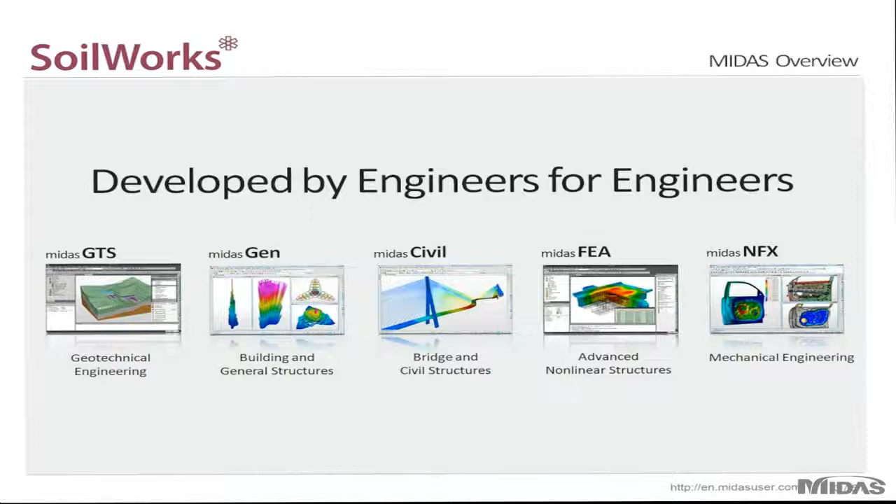Our company was founded about 20 years ago, but within that short time frame, we've been able to establish a worldwide network. Hundreds of thousands of engineers around the world are currently using our software, and it's a very powerful tool for them. They've been able to increase the efficiency of their work and save much time and money.

We pride ourselves on being total solutions providers. Any types of problems or projects that engineers face, our software provides solutions. We have world-leading technology - our software is used by leading firms around the world for landmark projects. From imagination to creation, our software provides the tools to make engineers' visions a reality.

And of course, our global network - by becoming a Midas user, you join a network of engineers that are using the software and supporting each other. We analyze and design the future. Our software is used for projects that create a better world, a better tomorrow.

We have a lot of industry-leading companies that use our software, and they've used it for many landmark projects. For example, the King's Cross Station in England was analyzed and designed using Midas GTS.

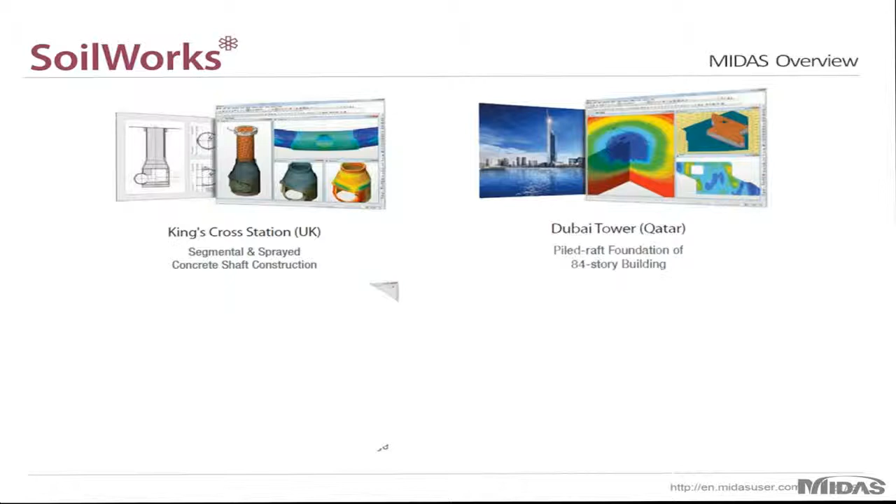Also, the Dubai Tower in Qatar, the Pile Raft Foundation was designed and analyzed using Midas GTS. Then the Russky Island Bridge in Russia, currently the world's longest and tallest cable-stayed bridge, was designed using Midas Civil. And the Burj Khalifa Tower, currently the world's tallest building, was analyzed and modeled with Midas Gen.

Now I'll talk a little bit about SoilWorks and give a brief introduction to it. SoilWorks is an all-in-one software package that's been designed to handle any type of 2D geotechnical project you may encounter, and it's separated into 6 different modules. This video briefly touches upon each module, and I'll go over the main features.

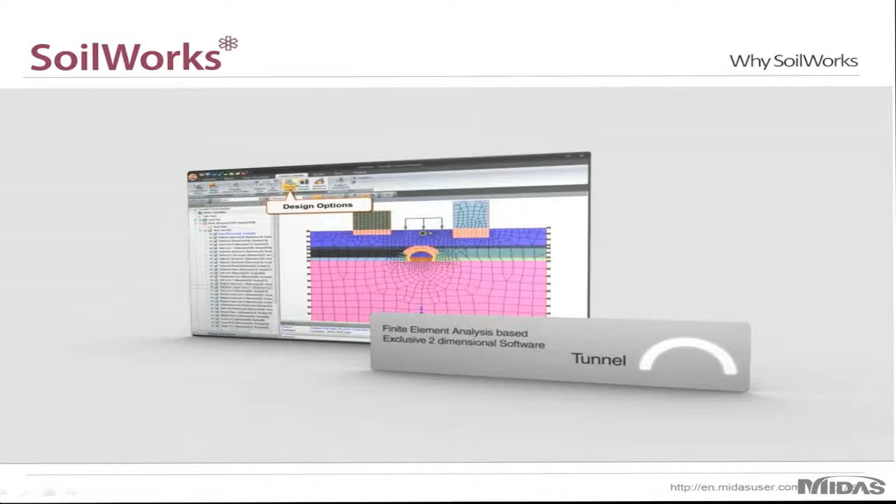There's the tunnel module for your tunnel design and analysis, also your general FEM modeling. You can also use it for excavation projects, and as you can see, you can get the effects of excavation on local structures.

The slope module for cut and embanked slopes. A great feature of this module is you can perform FEM and LEM analysis simultaneously. You can also check your reinforcements.

The soft ground module for settlement. You can analyze the settlement of a clay soil over a long period of time. You can also analyze the immediate settlement of sandy or siltier soils.

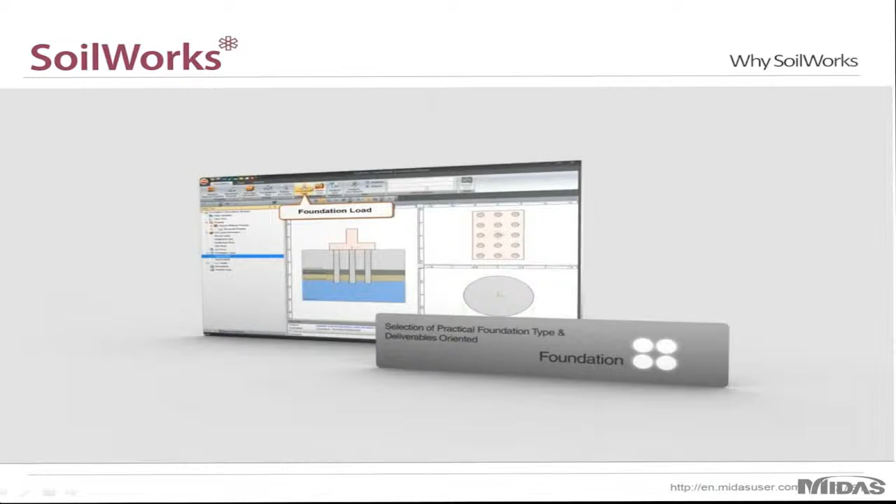Then the foundation module for PY analysis of your pile configurations. You can model multiple pile configurations simultaneously and immediately get your results.

And then the seepage module to analyze the effects of seepage on your soil interaction or your foundations. This is often used for dams and levee analysis, but you can also use it in coupled analysis with a slope module. Then last, the dynamic module for your seismic analysis. The program has a database of history records for earthquakes, so you can get a very accurate simulation of an earthquake in the area in which your project is involved.

So those are just the 6 modules. As you can see, any type of project that you might face can be handled with this software. It's an all-in-one package.

One of the main things to remember about SoilWorks is that it's very fast. We've created 7 innovative smart features to help cut down on the time it takes to perform your modeling and analysis. This primarily focuses on eliminating repetitive processes and reducing the number of steps it takes to complete your projects.

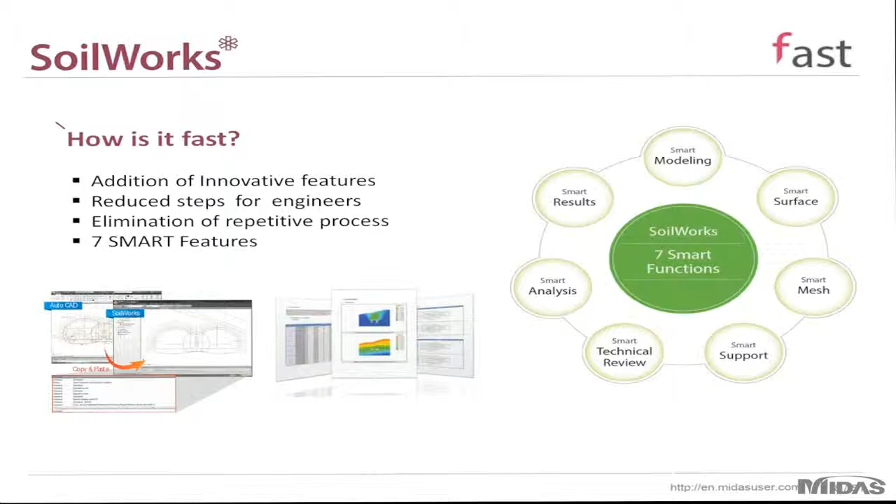The best way to really demonstrate how fast SoilWorks is is just to give a demonstration. In the following video, we'll watch a user using SoilWorks to model and analyze a tunnel project. As he does so, he'll be using several of these smart features, and I'll just be touching on each one as we watch.

First, he'll choose the tunnel module, since this is a tunnel project. Afterwards, he'll define his units. We have a broad list of options for your units—everything's included. Next, he'll import his AutoCAD file. Instead of having to draw your model in the program, you can just import it directly, so within a few seconds your drawing is set.

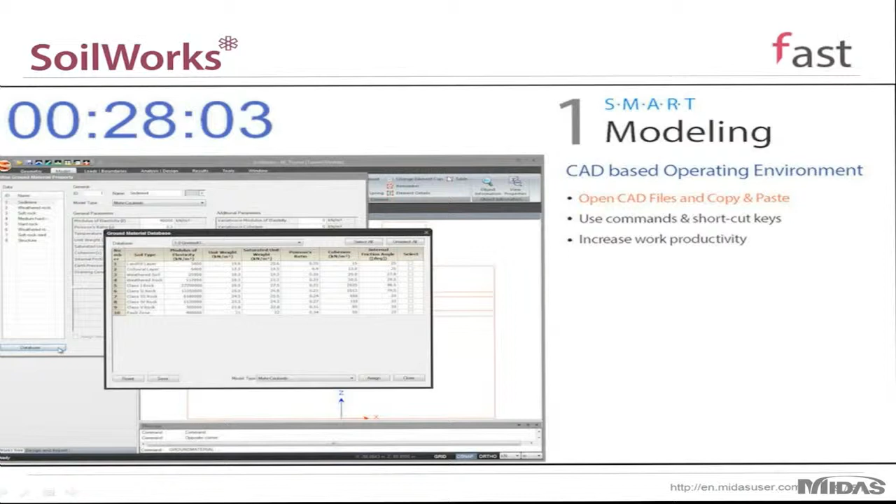Next, he'll assign ground material properties. We have an extensive database of ground materials that you can intuitively choose from, and each material comes with its various properties. If a material isn't included, you can just input it into the database.

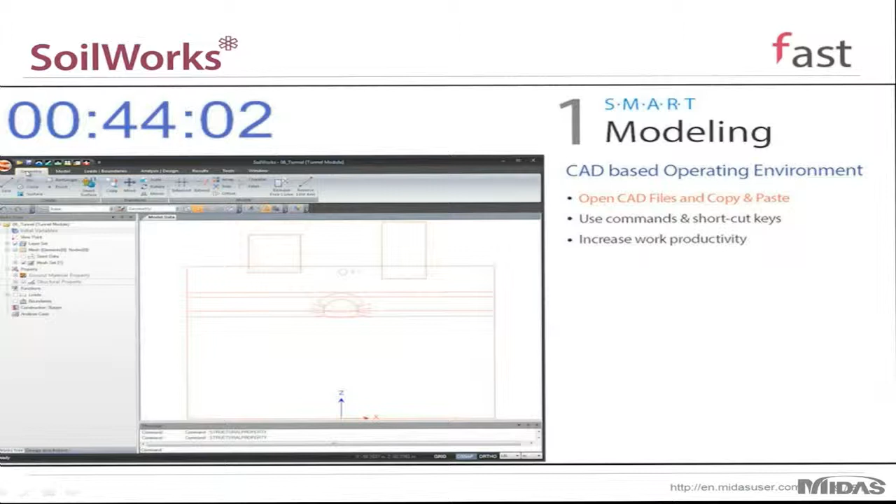Then structural properties. We also have an extensive database of various structures, their properties, and section shapes and types for any kind of element you'll be using. There's also a smart surfacing feature that allows you to intuitively separate your surfaces, and the user simply drags and drops the material and structural properties onto the drawing.

Then there's the smart mesh feature—within a couple of mouse clicks, you can have your meshing set for you, along with all of your mesh sets in the work window.

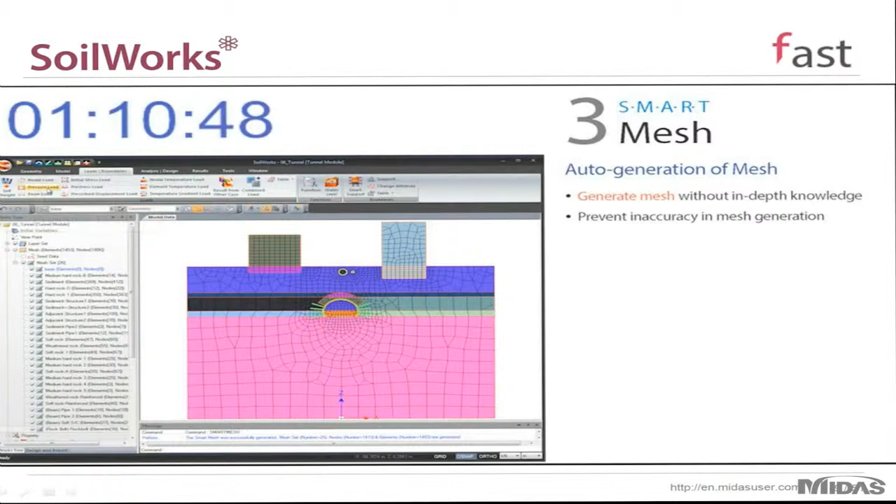Next, he'll be applying his pressures. For this particular project, he'll apply a distributed load just over the tunnel to represent traffic. The Smart Support feature allows you to intuitively set your boundary conditions.

Then there's the changing attribute feature. This allows the user to change the attributes of various materials over a certain period of time. For example, in this construction stage analysis, the attributes of the foundations will be changed, and that's what the user is assigning.

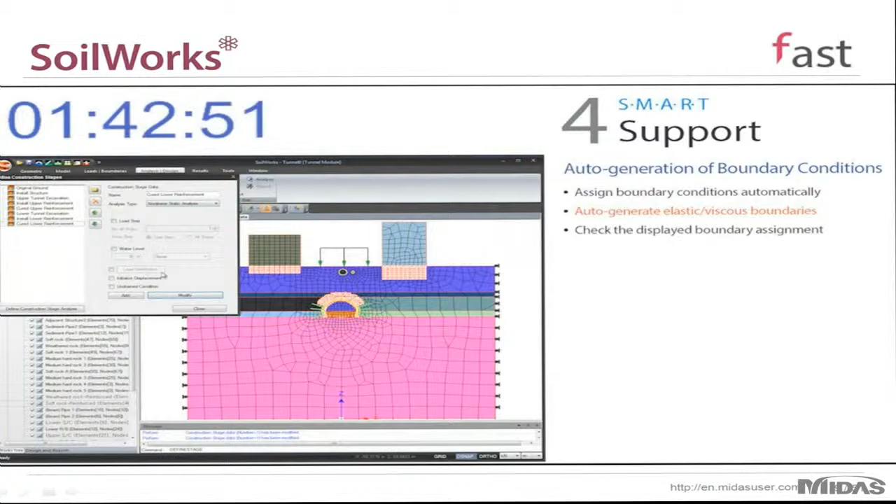Then construction stages. For construction stage analysis, you can easily format your construction stages, and also define which elements will be present during each stage, so you can get a very accurate simulation of the changes that take place over the course of excavation or construction.

Next, he'll be defining his analysis cases. This will be a tunnel project with a structure check, and he's just defining all of his properties.

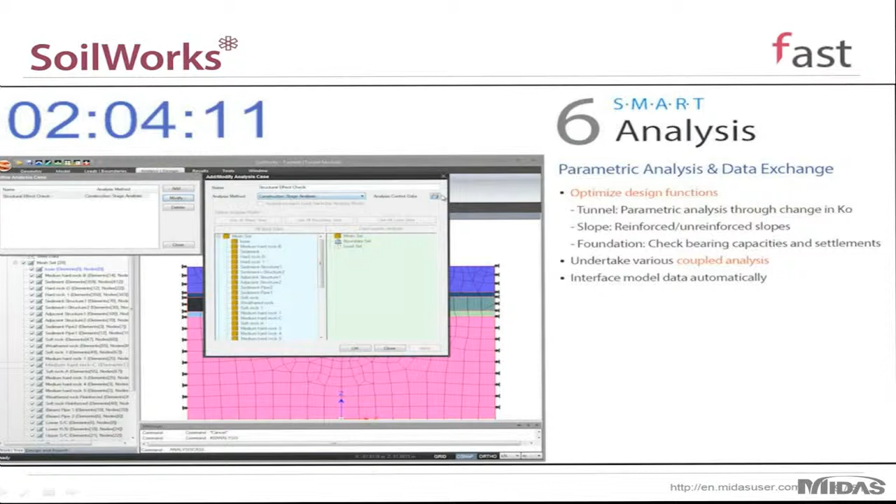Then design options—he'll be specifying his options for design, assigning the allowable displacements for the elements and also the allowable shear stress.

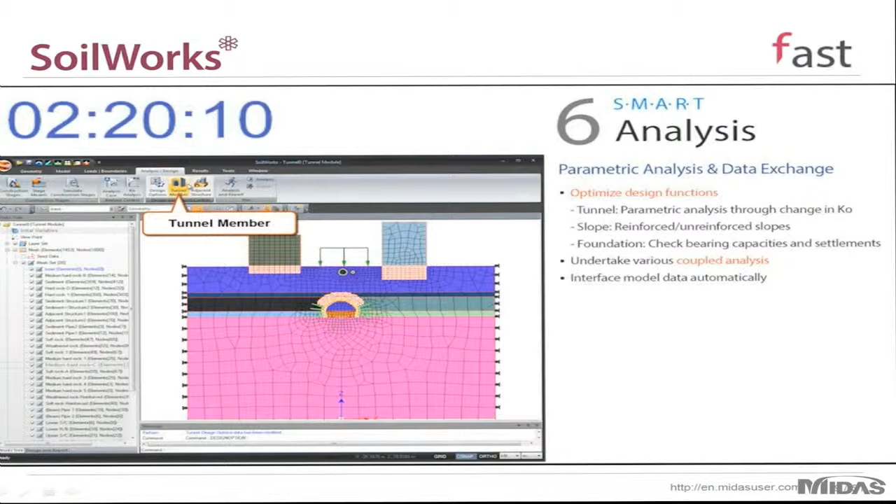Then tunnel members—this allows you to group elements you'd like to see analyzed together. In this project, he'll choose the rock bolts to be analyzed together in the final report, so instead of having to extract results from a large spreadsheet, they'll all just be grouped together for him.

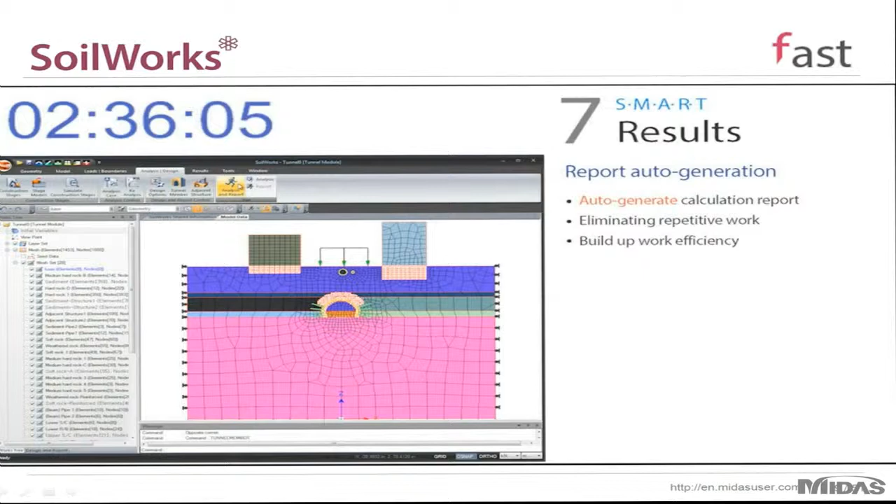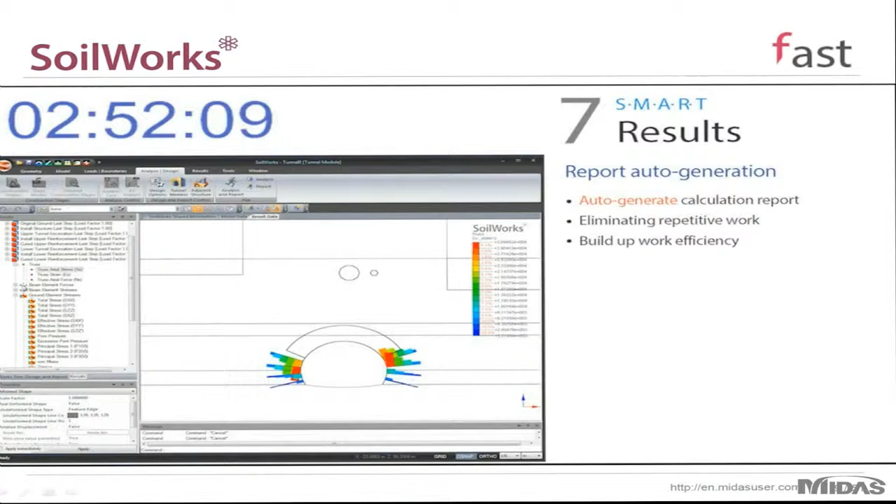And then finally, he'll perform his analysis. Within a few seconds, you're in post-processing, and all of your results are easily formatted and laid out for you. You have your contour tables representing your various displacements, deformations, etc. The rock bolts and crown members are grouped together so that in the final report, it's all very easily formatted for your convenience.

So in about 3 minutes, he was able to finish everything. Obviously, that was an idealized example, but that just goes to show how quickly you can perform your modeling and analysis with SoilWorks.

Next we'll talk about some of the key features of SoilWorks. Smart meshing—as you saw in the video, the user is able to immediately create his meshing using the smart mesh method. That being said, other options are also available to you.

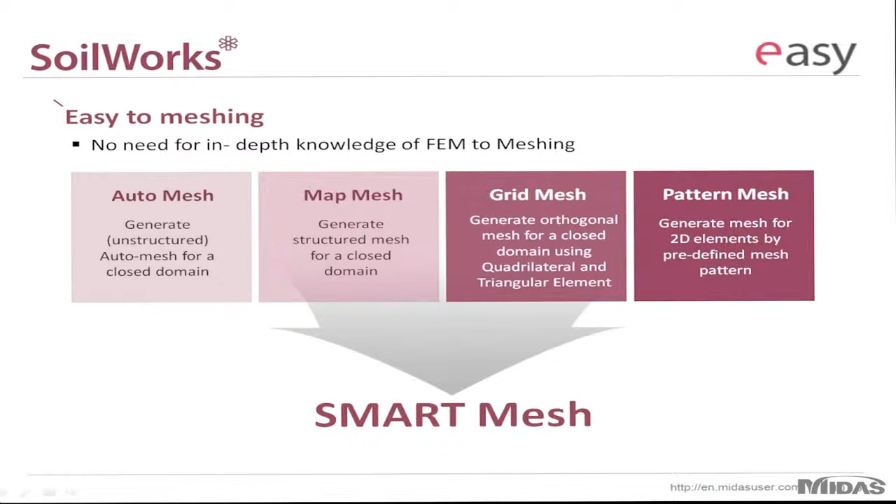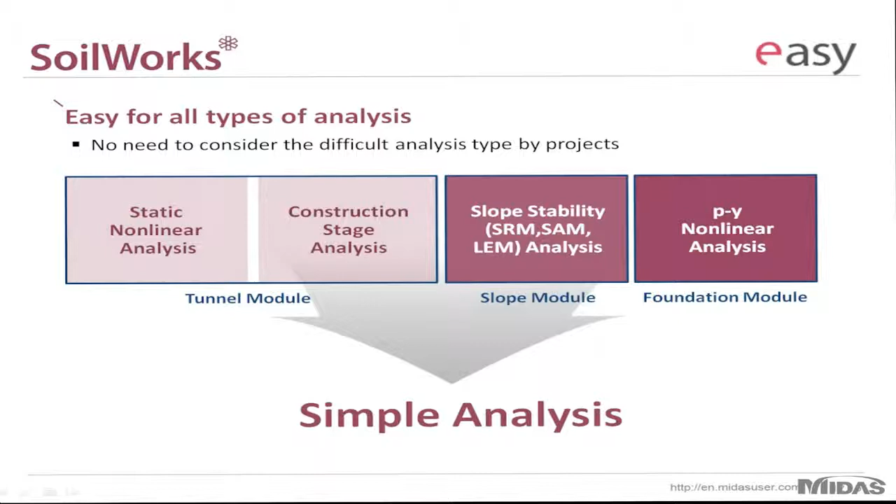You can easily create models without FEA knowledge, since we have a large database of various material types and properties you can use for your projects. Simple analysis—the software allows you to perform your analysis without having very in-depth knowledge of it, so all of these analysis types are available to you. With a simple click of a button, the software will perform the analysis for you, so you can just focus on results.

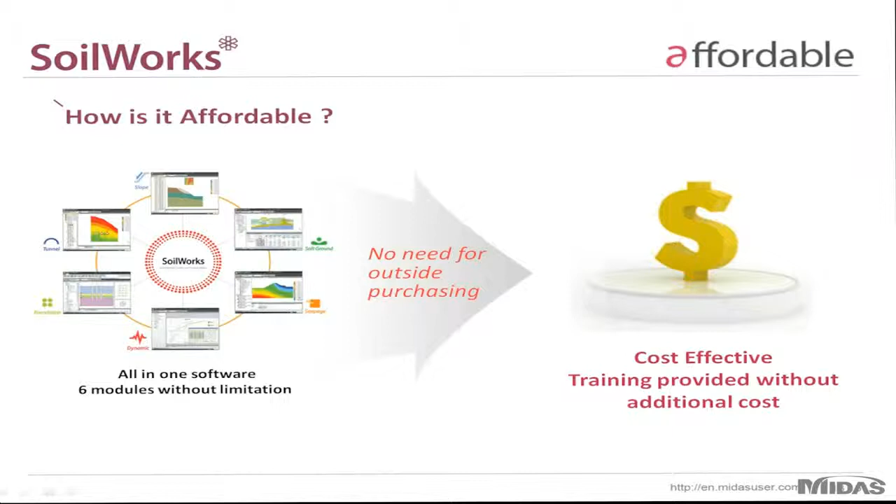SoilWorks is very affordable. As I said before, it's a 6-in-1 sort of software, so all six modules come in the package. You won't have to worry about purchasing any outside software. A lot of geotechnical companies have several software packages to handle their various applications, but with SoilWorks, you just get one all-inclusive package at a very competitive price.

So those are the main things to remember about SoilWorks. These are the main benefits. First and foremost, it's fast because of its 7 smart features, which we just discussed. It's easy, any engineer can use it. It's very user-friendly, has a very soft learning curve, and we provide free training and free technical support. And it's affordable because it's a 6-in-1 software that streamlines all of your work, so you only need one software package.

Okay, so I'll just go into a few in-depth design features now.

Currently, for example, with tunneling, there's an 8-step process that exists because of construction stage analysis. Engineers often have an iterative process in steps 4 and 5. But with SoilWorks, we're able to streamline the work so that multiple cases can be analyzed in a single file, greatly reducing the time it takes to perform parametric studies. Also, the auto report generation feature allows you to immediately generate your report through the software, instead of having to extract the results and format them yourself, within a matter of minutes.

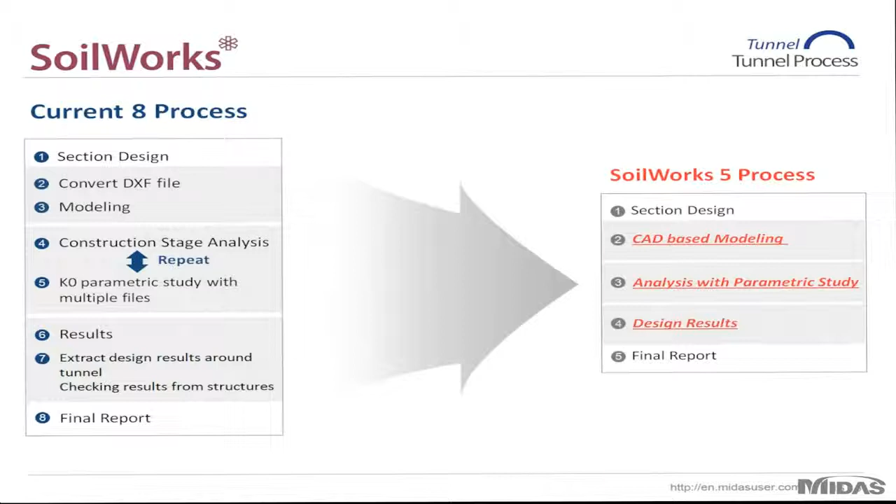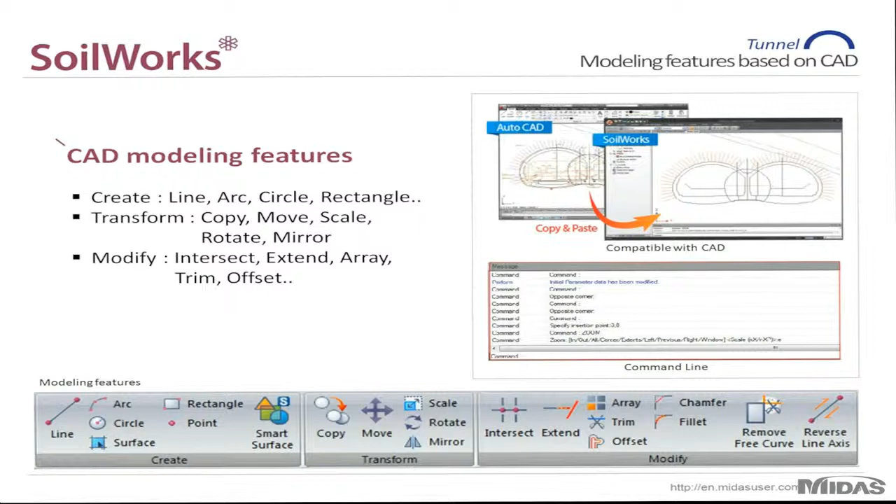CAD modeling features: another great feature of the software is that if you can use CAD, you can easily use SoilWorks to model your drawings or your projects. All of these commands should look familiar, so if you're familiar with CAD, you can easily just use SoilWorks to do all your modeling.

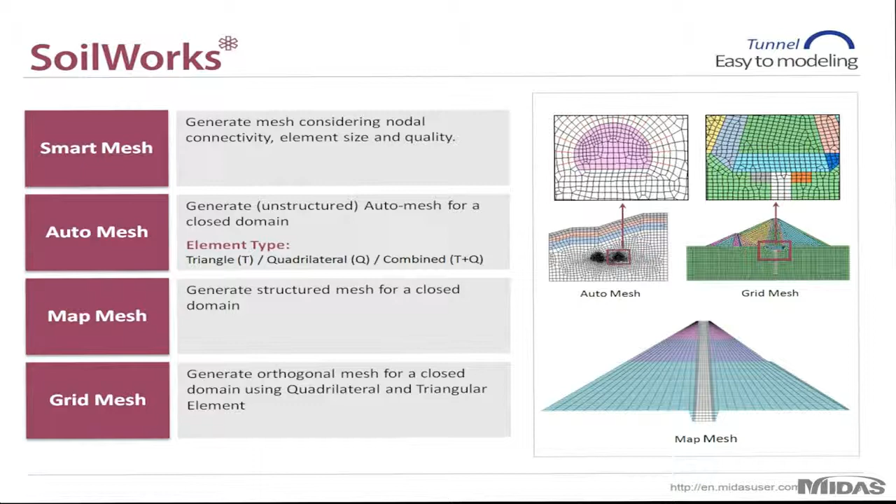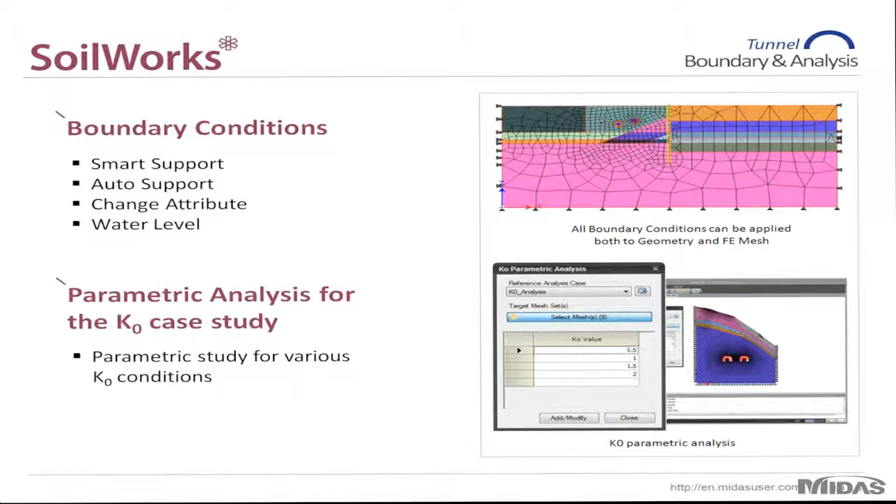Smart meshing allows you to intuitively create your mesh, but if at any time you need to do auto, map, or grid meshing, these options are available to you. Boundary conditions, as you saw in the video, can be created very intuitively. And load types: the software includes all load types that you could possibly need for your projects.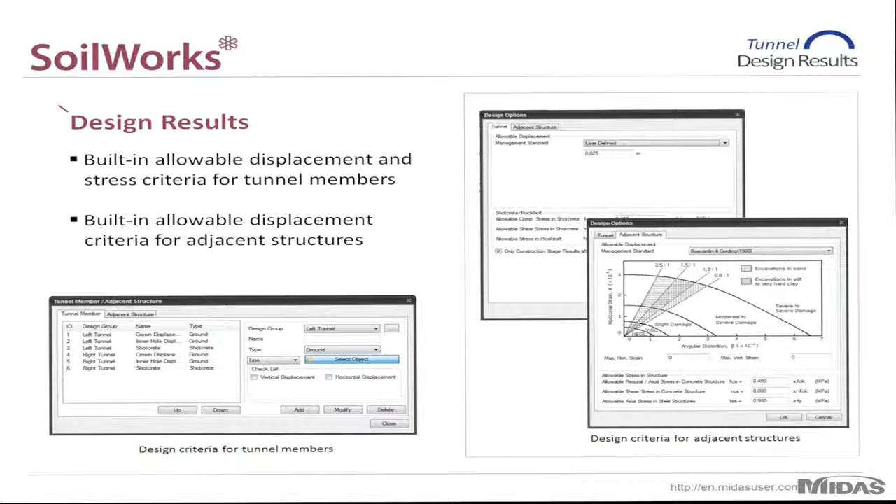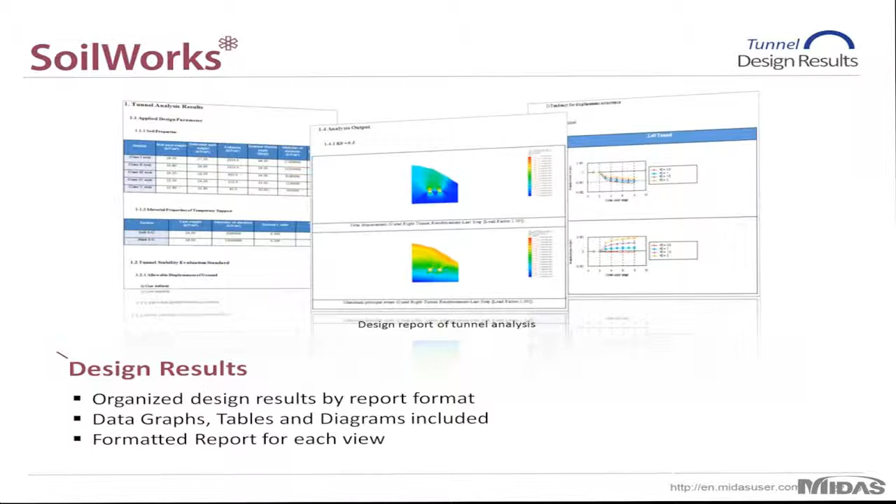Design results allow you, once again, to group your analysis. For example, if you have certain structures or sets of elements you'd like to see grouped together, you can intuitively choose those to be printed in your final report. As you can see, the final report is very clean, very easy to read. Everything's formatted for you - your charts, your graphs, etc. - and even a table of contents will be created for you through the auto report generation feature.

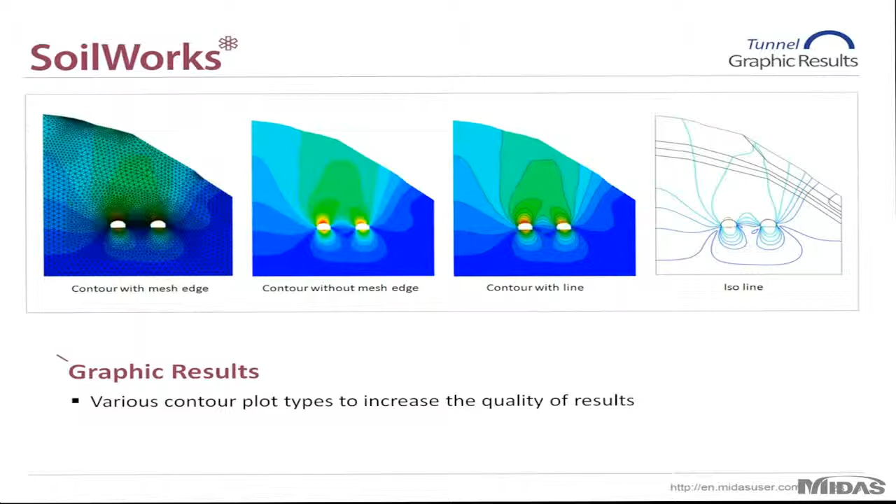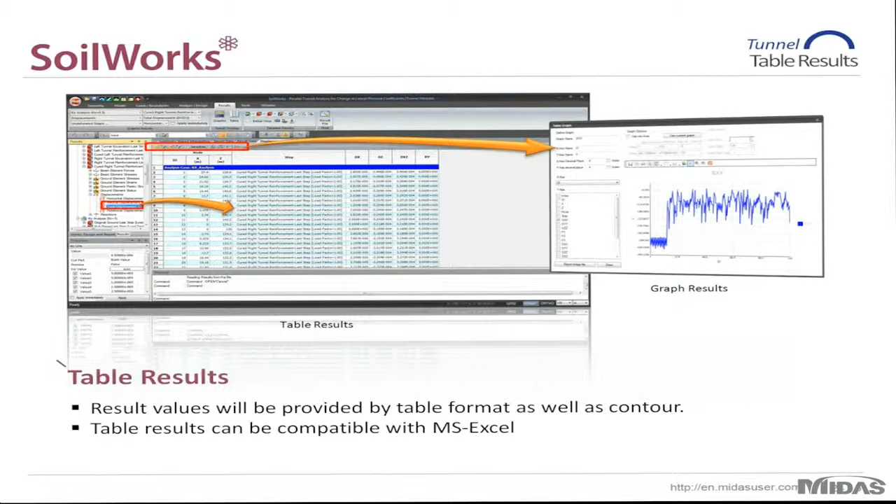You also have a wide range of graphical results to choose from, so depending on personal preference, you can choose from various contours and graphs to include in your final report. And tabular results: all of your results are formatted in Excel format and included in the post-processing, so instead of creating the graphs yourself through an Excel sheet, the program will create it for you.

Okay, so in the interest of time, I'll just speed to our conclusion.

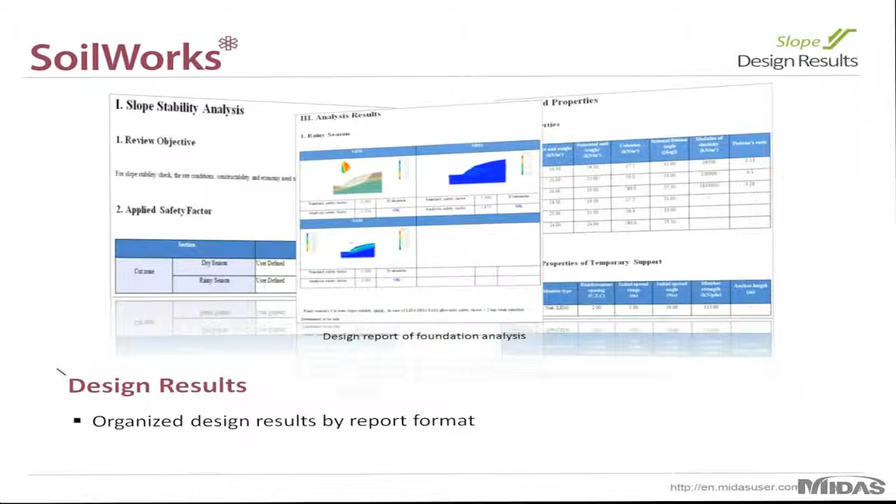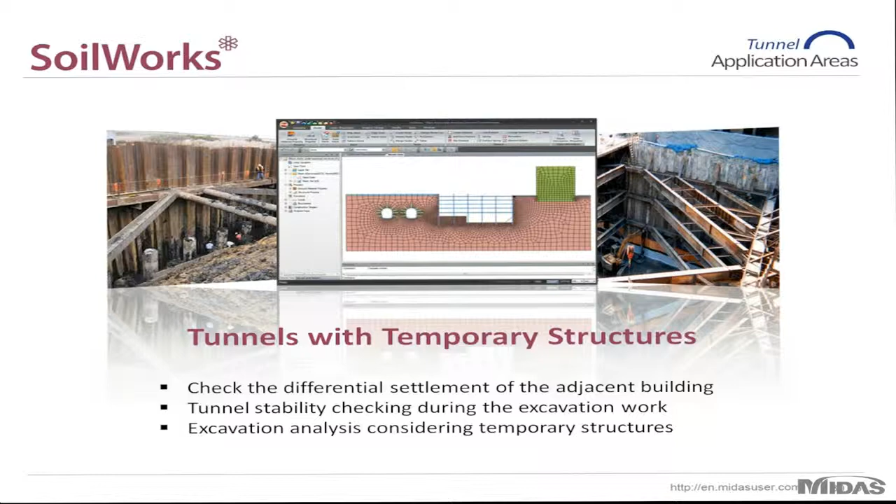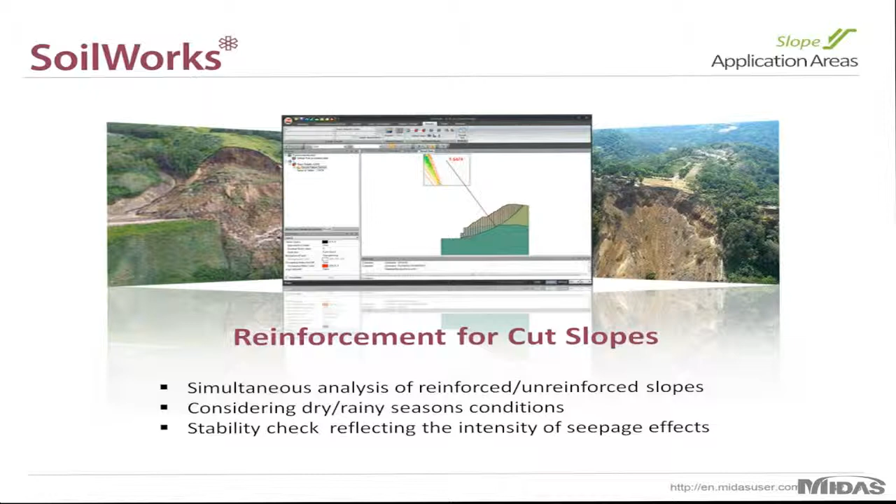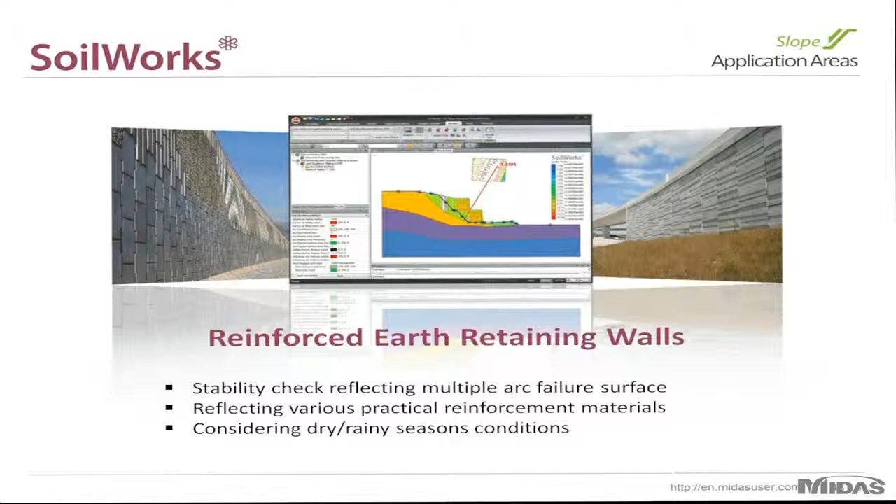Reinforcements for cut slopes, so you can intuitively compare the effects your reinforcements will have on your slopes. You can also check for dry and rainy seasons using coupled analysis with the seepage module. Slope stability at a tunnel exit. Reinforced earth retaining walls - another type of project the slope module can handle for you. Stability of a piled raft foundation.

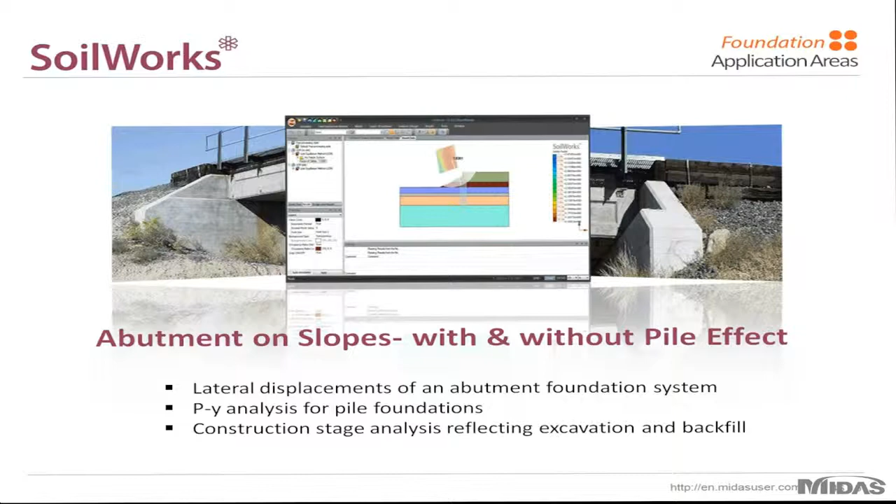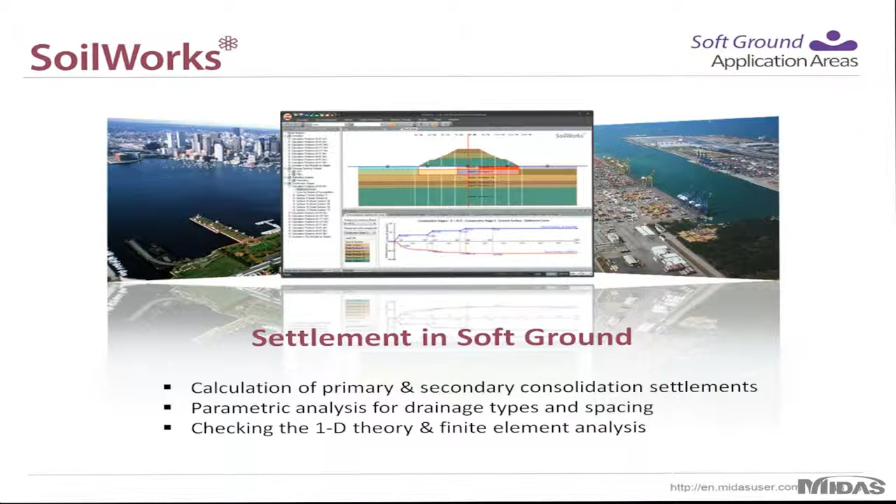Obviously using the foundation module - abutments on slopes with and without pile effects, so you can intuitively compare the effects your piles will have on your slope. Group pile behavior is another function of the foundation module. Settlement in soft ground, obviously for the soft ground module, so you can analyze the consolidation of clay soils over an extended period of time.

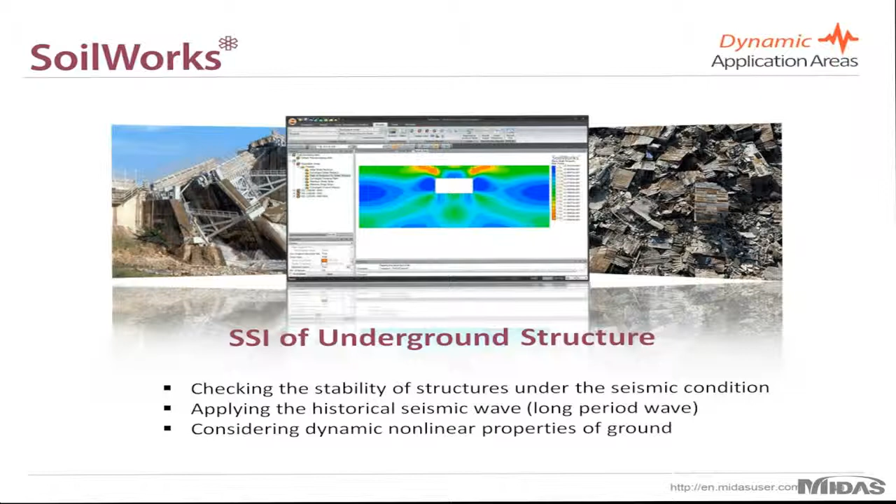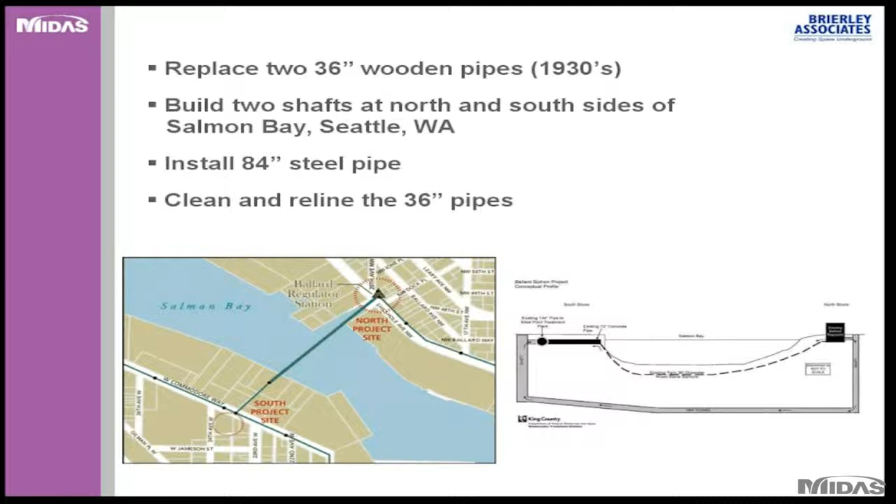The idea is to replace the two 36-inch wooden pipes with an 84-inch pipe, and after building this pipe, they will go back and clean and reline the existing 36-inch pipes, adding them to the system later on.

Next, I will cover the geotechnical conditions at the site. We have about 8 feet of what's called Holocene fill, mainly sandy and silty fine to coarse gravel, with coarse gravel and medium stiff clay. Then there's 10 feet of Vashon outwash, medium dense fine to medium sand with fine gravel, some cobbles and boulders. This is followed by about 70 feet of pre-Fraser deposits, mainly very stiff to hard clay, with some interbeds of medium dense to very dense sand, also with cobbles and boulders.

All these layers are underlain by the pre-Fraser slickensided deposits, which are very hard clays with some fissures or fractures filled with sand. In that formation, the in-situ stresses are significantly high, and based on in-situ measurements, the K0 values ranged from about 1.6 up to 3, though I doubt the 3 value - I'd imagine it's more like 1.6 to 2.5 at most. So these are basically the geotechnical conditions at the launching shaft site.

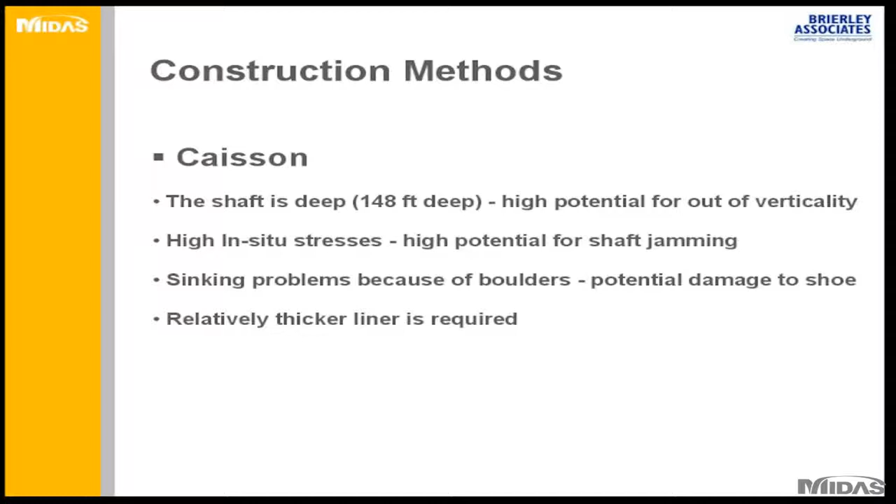The existence of boulders and cobbles can, in some cases, damage the shoe and hinder the progress of building the shaft. With this system, you'll end up with a relatively thicker liner compared to the VSM, or vertical shaft machine system, which I'll describe later, where we use only a 15-inch thick liner or segments.

The second alternative is the use of a slurry wall system using a digger or a hydro mill. Again, you'll end up with a thicker liner, and if you apply the ACI 350 code, you'll end up with a significant amount of reinforcement needed in the segments. This system also uses a larger space for setup, and it's expensive compared to the system I'm going to discuss.

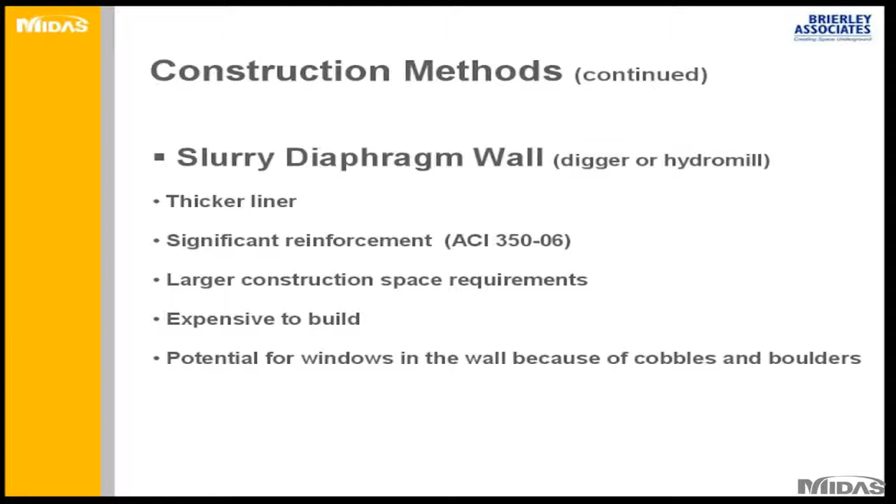Another issue is that if you have cobbles or boulders, you end up with what we call windows in the wall. Some of the boulders may come into the slurry or the concrete after you pour it, so you end up with windows in the wall itself.

The last alternative is ground freezing. If you start using ground freezing, it's a very expensive and time-consuming process.

One serious problem or concern is the potential for eroding the freeze wall. I'll describe one case history where you can end up collapsing or failing the whole shaft if you start eroding the freeze wall.

Another issue is that you should always keep a reasonable rate of advance of the TBM during the course of the project, especially near the shaft itself.

There was one case history where the TBM broke shortly after breakthrough near the shaft, and it took 3 days to fix the TBM. When the contractor tried to advance the TBM, he couldn't, and the TBM was actually frozen in place.

When you start heating the TBM, trying to thaw the ice around the machine, eventually it eroded the freeze wall, and water started rushing into the shaft. In fact, the whole shaft collapsed and failed.

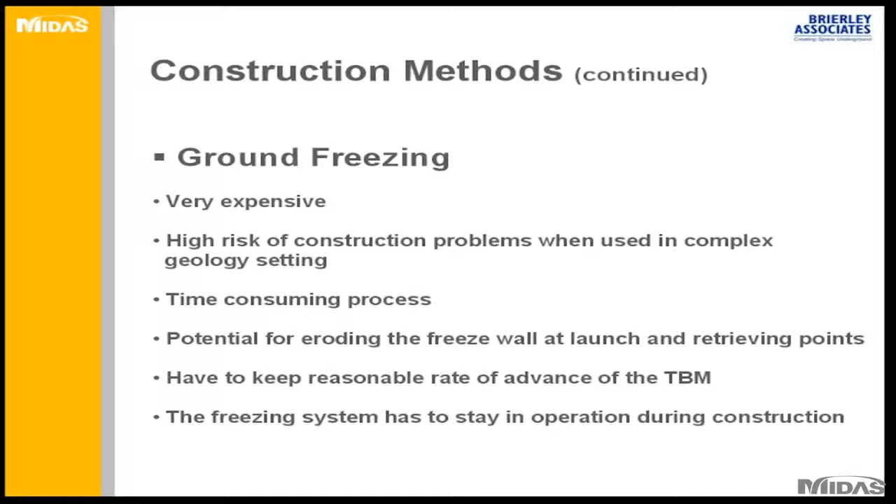Other issues include having to keep this system running all the time throughout the construction process of the shaft.

About 7 feet of concrete were destroyed when the contractor hit very hard clay with very high in situ stresses. The K naught here, the ratio of horizontal to vertical stress, was about 1.2 to 1.4. In our case, the ratio was 1.6 up to 2 or even 2.5.

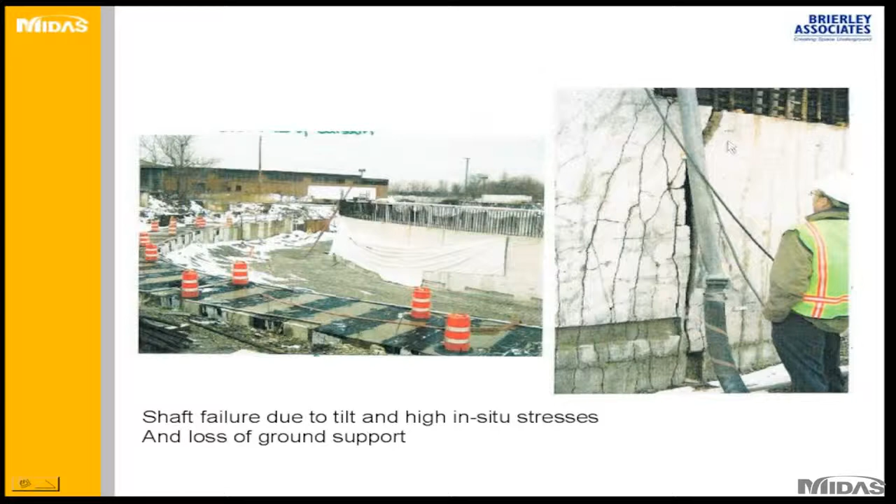On the left you see a picture of the shaft, and on the right a picture from inside the shaft, where you see all these cracks propagating. They started from the bottom up.

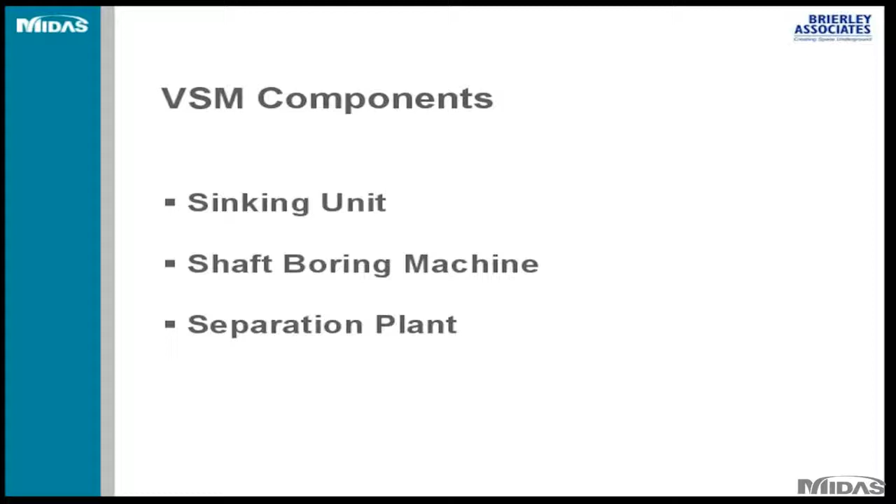Next, I'm going to describe the vertical shaft machine and its different components. The machine basically has 3 main components: a sinking unit, what we call the shaft boring machine unit, and a separation plant. The separation plant is needed if you're working in the wet, since this machine can excavate in both dry and wet modes.

The sinking unit has 3 or 4 more components. First, you have 3 to 4 winches and jacks at the ground surface, each with a capacity of 300 to 500 tons. Then you have a massive ring beam at the top to support the jacks and winches. This ring beam is not connected to the shaft, it's a separate unit that surrounds the shaft. Then you have steel strands, or cables, and black boxes into which the steel strands are fixed. I'll show some drawings to explain all these components.

The main purpose of the sinking unit is to keep the shaft level at all times. Using the sinking unit, you're able to suspend the whole shaft during construction, then let it sink as you excavate below.

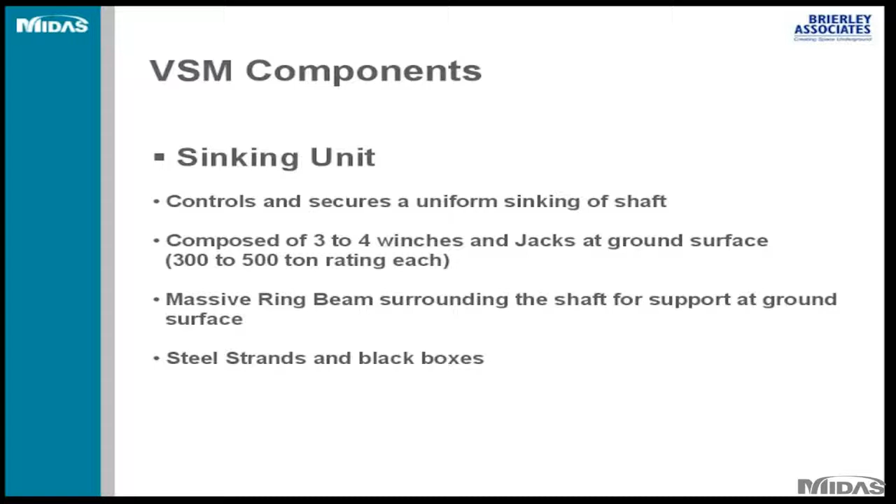Each ring of the shaft has 4 segments, which are 15-inch thick prefabricated fiber reinforced concrete segments.

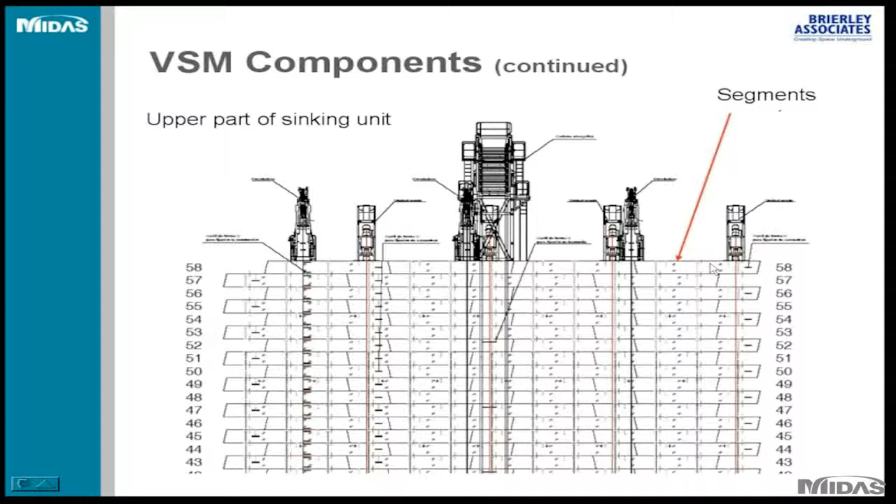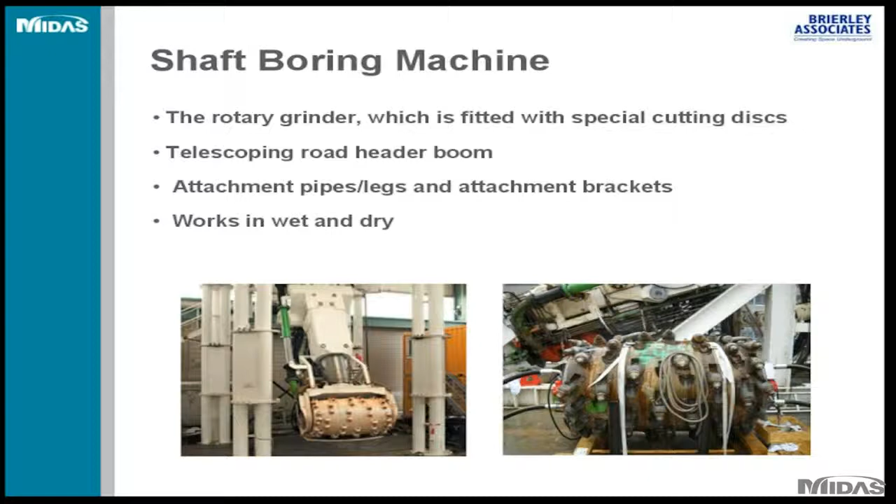The second part of the VSM, or vertical shaft machine, is the shaft boring machine. It's almost like a road header, with a boom and a rotary grinder, and you can fit it with different special cutting discs depending on the soil condition or soft rock. The arm has a telescoping feature, so as I'll show later, you can over-excavate or under-excavate under the segments as you advance the shaft. And as described earlier, you can use it in wet or dry conditions during construction.

Remember that this shaft is connected to the very top, so the shaft boring machine is independent of the sinking unit. They are 2 separate systems, not attached to each other. Of course some controls go to the control unit, but you can see they are independent.

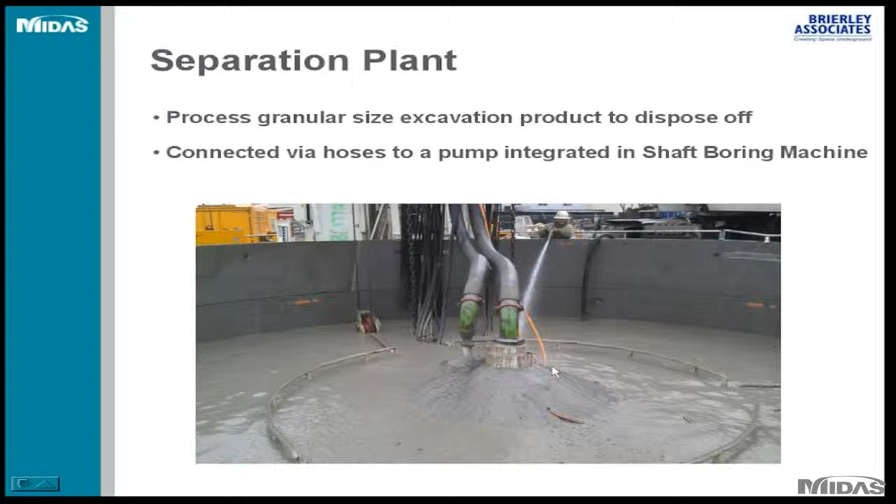Finally, I'm going to briefly cover the design considerations. The idea isn't really to give a step-by-step design procedure, but to show that you don't need much reinforcement if you consider the soil structure interaction, as I'll show in the next few slides.

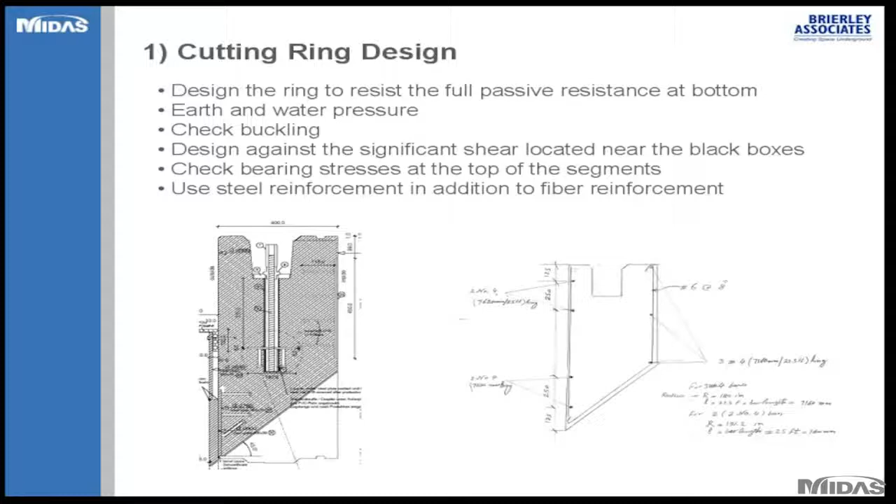As I described earlier, these are fiber reinforced segments, but we have to use additional regular reinforcement to account for the higher stresses in some of these segments, specifically the cutting ring segments and the shaft boring machine support rings. You remember I showed this before—let me go back very quick here.

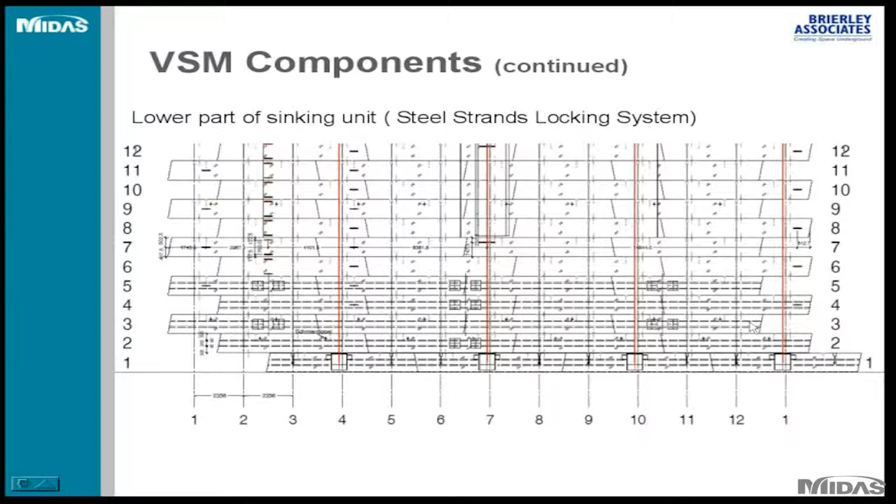As you see here, the boring machine is attached by three legs via some brackets or steel blades. Two segments do that—segment number 3 and ring number 5. Actually, these are the two rings that the blades went through, across them, to support the 80-ton vertical shaft machine here. So the main design consideration for these two rings is to consider the torsion.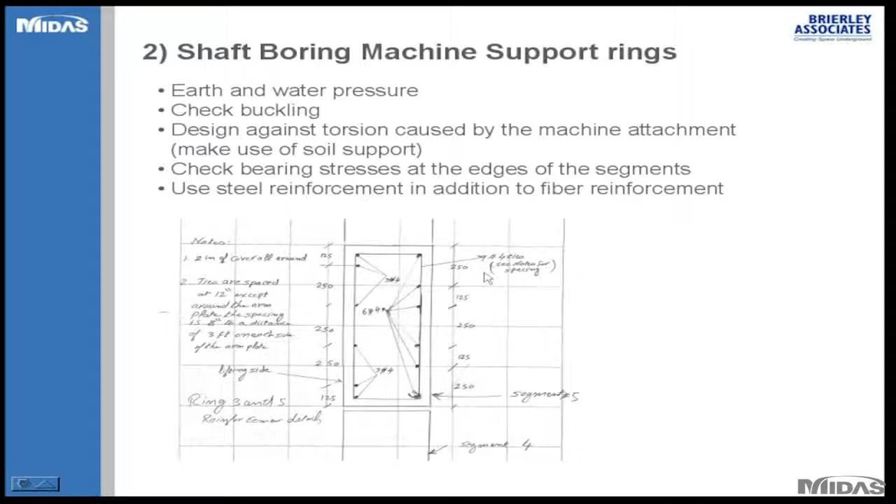Because the load is applied at the edge via the steel blades, you need to design for torsion, and also look again at the forces coming from earth and water pressure, and check again the bearing stresses, which is always a concern because of the relatively thin segments. But again, you don't end up with heavy reinforcement—it's like 6 number 4 longitudinal bars, circumferential, that go across the perimeter of the segments, to resist the torsion. In addition, you have number 4 ties, spaced 8 to 12 inches depending on the location.

The other item I'd like to cover, not shown in the presentation, is the trim slab at the bottom. The beauty of using this vertical shaft machine is that you're able to control the shape of the excavation at the bottom. So what we did is have an arched shape, like an inverted dome. Rather than a plain slab, you have a curved trim slab at the bottom, and this significantly reduced the moment. In fact, we didn't need any reinforcement at the bottom for this trim slab. It was about a 10-foot thick trim slab, and the construction is done and holding still, working fine. We're getting ready for the breakthrough next.

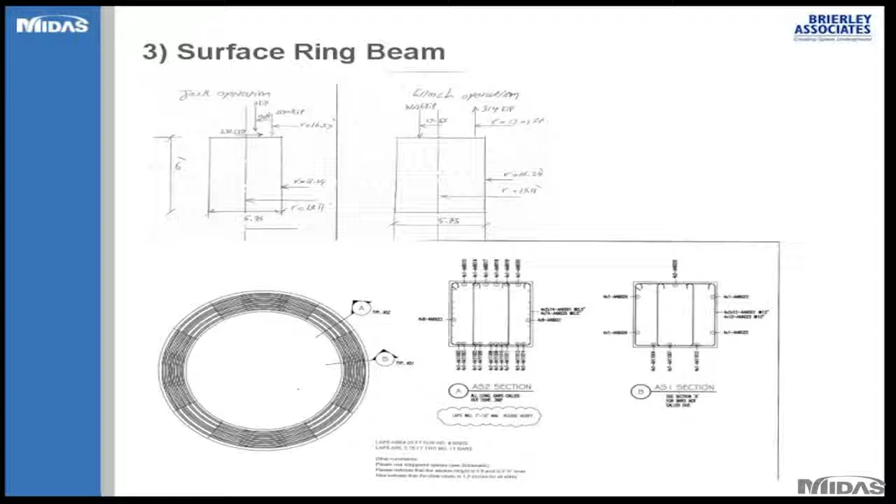And the system worked, as I said, in the dry and wet, so no need for dewatering, which was a concern here because the groundwater at this site was polluted. So no dewatering at this site.

And this system can work on electric power, so you don't have as much noise as a diesel engine. This is critical if you are working in the city or any urban location.

Also, as I said earlier, the footprint of this system, the setup, is really small. It doesn't take a huge space to set up the system.

And then once you do all this underwater, you put your trim slab and everything underwater, and eventually when it hardens and reaches the desired strength, which for this case was about 4,000 psi concrete strength, you can actually start dewatering and removing the water from inside the shaft. So this is how you handle water in the shaft.

I think one person asked about the rate of advance. I think I covered this. It ranged, as I said, for this project the average was about 8 feet, and you can achieve up to 15 feet a day.